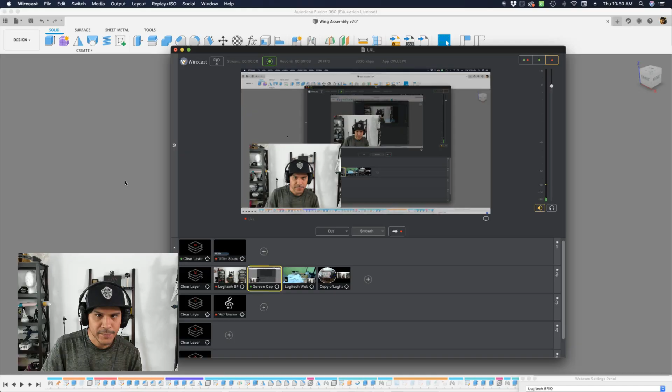It's a fun animatronic wings, a set of wings that uses servos. Here's a little video of our prototype in action with the wings mounted.

This uses the Adafruit Feather M4 as the microcontroller, and to power the two servos we're using the Adafruit Servo FeatherWing. That gives you 8 channels, so you can have 8 different servos doing things. And it's all running on CircuitPython.

Very sweet. So I want to talk about the design of the servo horn attachments and a little bit of the mounting bit. So there's the demo, and let's jump into what we have. Here's the CAD assembly.

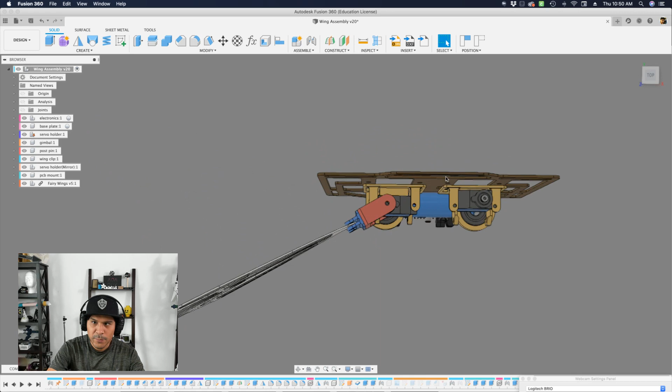I have one wing set up here, and it was really important to get the joint set up so I can simulate the movement of the servo horn. So this is a joint that's attached to the servo, and you can see here we have some degrees of freedom. It's able to come out here, and then it can go back up here.

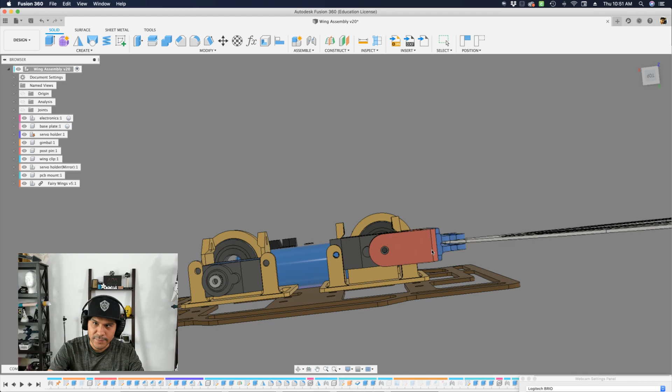So it's about 90 degrees or 120 degrees of rotation, not too much here. But what's interesting is the way the load is being counterbalanced.

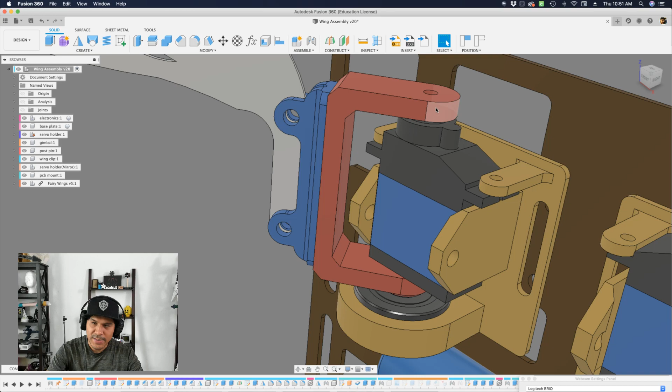Underneath the servo is this ball bearing. It's a ZZ608 ball bearing, kind of your standard size. What it does is it offloads all of the weight from the shaft of the servo down here. Because of the way it's mounted, we need to have this counterweight. So it works out pretty well.

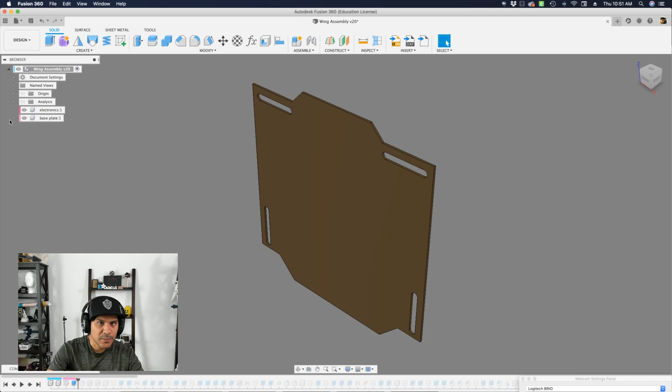So I'm going to step back into the timeline and walk through the design. Really the first thing was to create the base plate to house everything. This is going to be worn on your back, as you saw in the demo.

I just needed to make a couple measurements, really. The two main measurements: it needs to fit on your back, and it needs to fit on the bed of my 3D printer, because I just want it to be one piece, or at least one piece for the backpack piece.

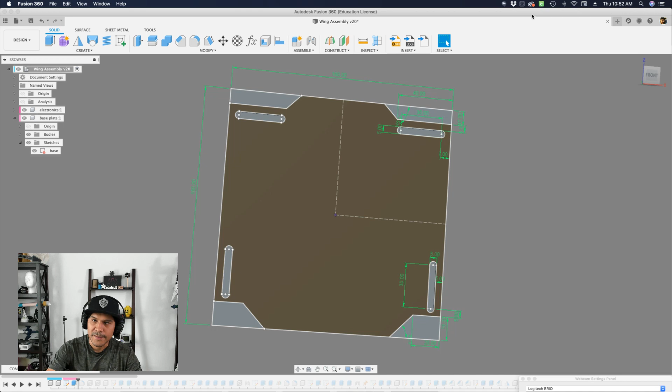And then we have these 4 slots that will act as attachment points for the backpack straps. So that's why I have them set up here. They're fixed numbers right now, but we could totally add user parameters.

What makes this neat is that I can adjust the overall dimension of the width and the height of the base plate, and these slots will actually stay retained to the edges because I've assigned them with some sketch dimensions. So I'll do a little demo here.

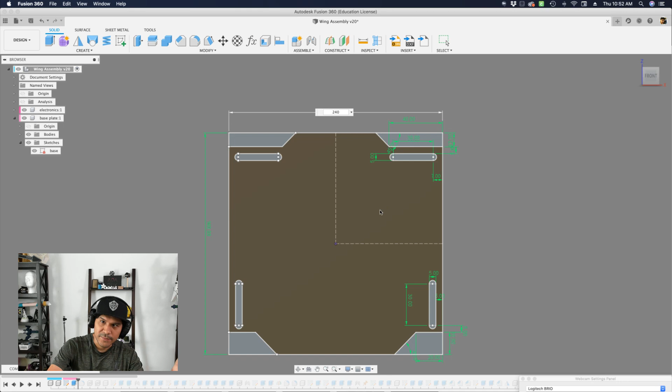Let's change that value there. You'll see the 4 tabs stay positioned because I have these very simple sketch dimensions that say, hey, you should be a certain distance away from this. So that's why I have these set up.

Let me undo that because it's not the shape we want. But yeah, it's very symmetrical. It's drawn like in the center.

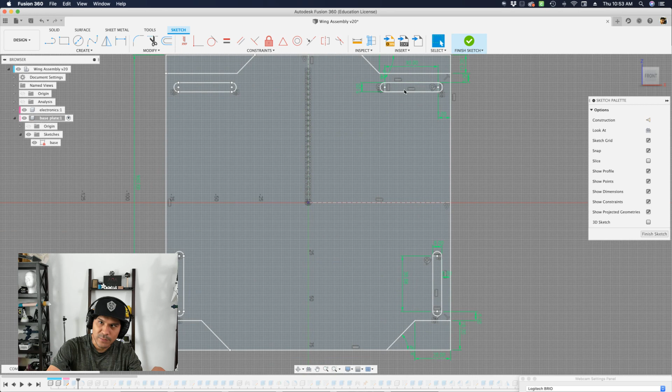So if you jump into the sketch, you can see I really just did 2 slots, and then I mirrored them. You can see all the different mirrors right here of all these little lines. So that's how that's working. It's a nice set of mirrors of shapes.

This could totally be changed up. We can add some more curves and things like that. I just wanted to have something that was easily adjustable and has some shapes to go worn on the back.

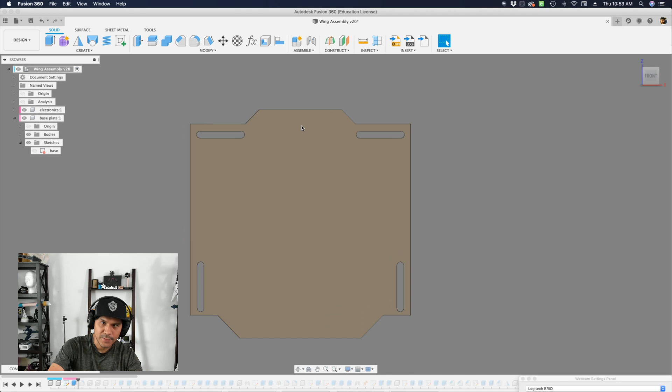The next thing I did was I had to model up the servo. Let's take a look at it real quick. This little guy is a high torque, all metal servo, and it's pretty high power as well. Here it is, it's from Adafruit. It's the high powered, high torque, full metal gear, the MG92B.

Unfortunately, the servo doesn't have super great technical drawings, but I was able to go to their website—I think it's Tower Pro. You go to their website and they have a data sheet and you can pull some numbers from there. But I did have to use my calipers to figure out the distance between these mounting holes.

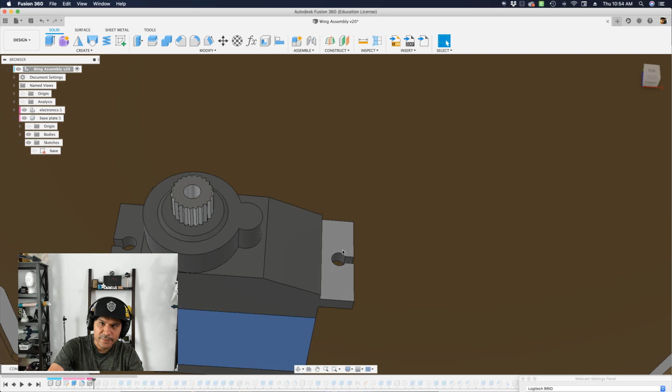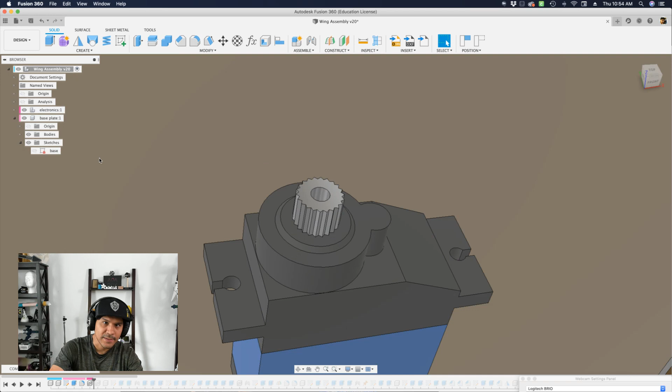What's interesting about this servo is that I designed it so the shaft has a rotational joint. I can't show it right now since it's not grounded, but if I open this, you can see it moving. I set it up as a 2-component piece: a body that's grounded, and a spline that's independent.

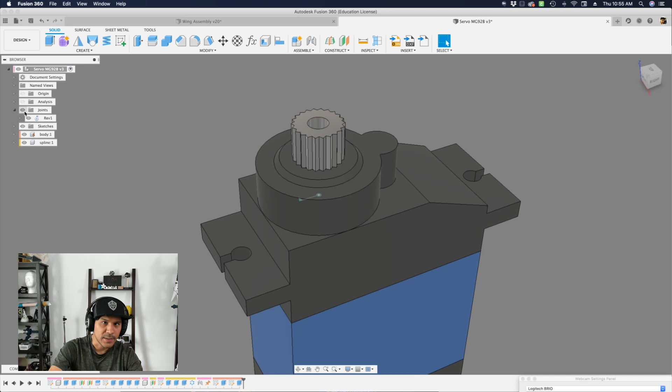If we look at the joint, I have it hidden because I don't like seeing it when I import it. That's the joint there, and it's a revolve joint. So I can move this, and you can see it moving around. There's no limits to it since it's just rotation, so it's free to rotate 360 degrees.

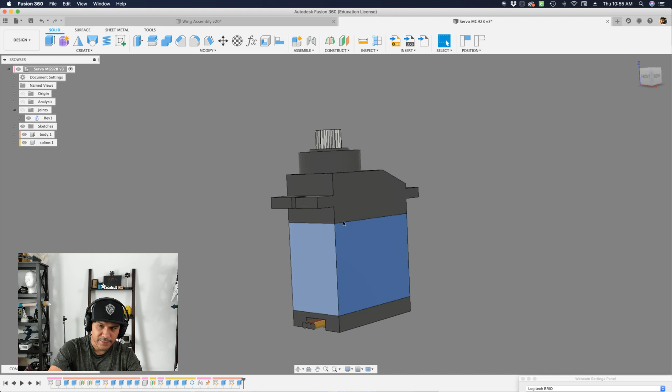Building that into the servo is really helpful because I can simulate it a bit better this way. Not too much here in the timeline to create it, but it's got some shapes. I've already tested it - the mounting holes are correct, and the sizing and fitting is pretty one-to-one to what I've modeled, which is nice. So here it is.

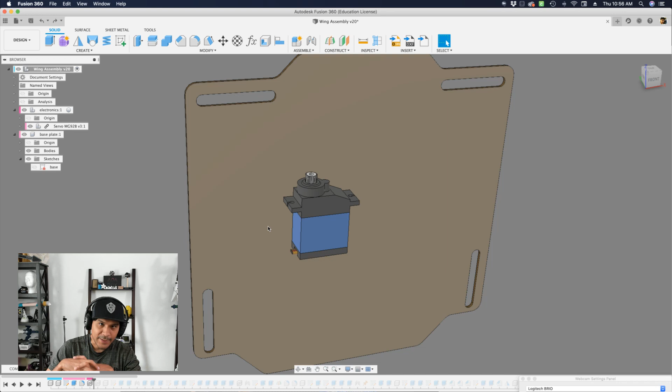After bringing it in and modeling that up, I had to figure out how to secure the servo to this mounting plate. Years ago I'd try to do everything in one piece, integrating all the tabs into the backpack. We could do that and it's all integrated, but it would take maybe 4 or 6 hours, and then you find out you're off by 0.5 millimeter, so that whole piece becomes useless.

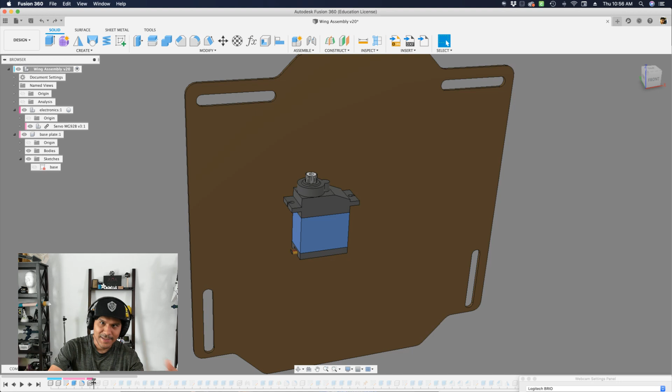So I figured let's make it all modular. The servo attachment will be separate from the backpack base plate, because we can quickly print out a small servo attachment as opposed to printing the whole base plate. That took me a few years to do, since I had the mentality to make everything simple with a single part instead of many parts.

Because we're 3D printing and trying to get this done quickly, we need to figure out the tolerances right away - it's better to have it modular, at least for this medium. So here I'm creating some sort of mount for the servo.

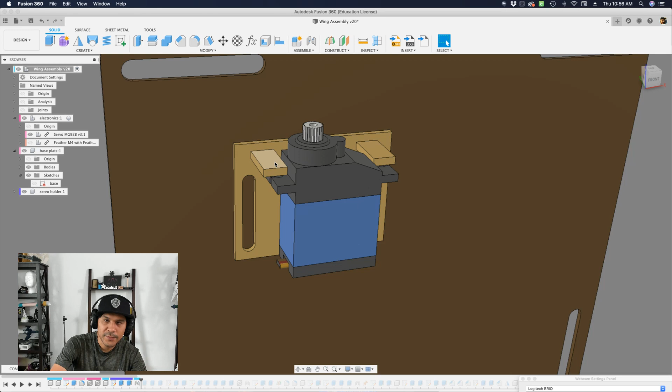You can see here I have some offset, because as I was making this I realized I actually can't have this surface flush with the surface of the servo due to the nature of using a ball bearing, which we'll get into.

I have these 2 slots on the sides that will be used to mount the servo holder to the base plate. Then I have these 2 thin walls here that extrude upwards, so we can attach it to the mounting tabs of the servo.

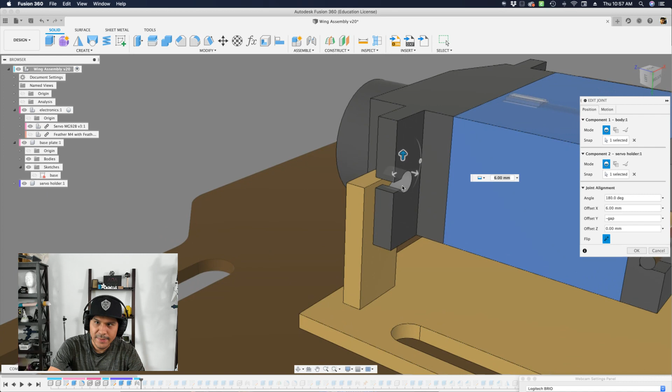If you look at the joint, it's just a rigid joint there, fixed in place. The way I joined it, I picked one of these edges and tied it to that edge, then added a bit of an offset gap right there for some tolerances.

If you look at it from the top, you can see I'm a little bit off there and a little bit off there, just for clearances, because the tolerances tend to expand a little or maybe shrink a little, so I just wanted to have those there.

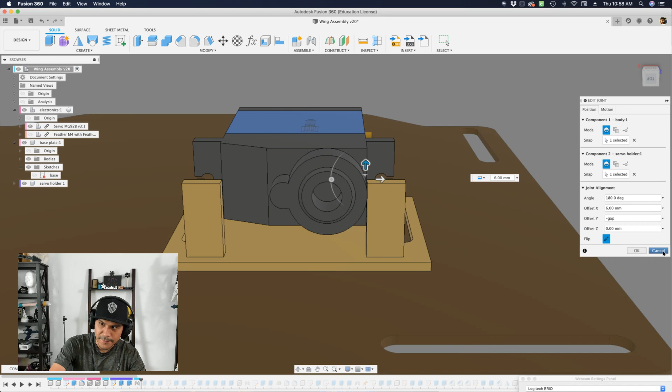The next series of extrusions are next - let's see what we did here, just fleshing out the holder. So if we hide the servo, you can see I have this kind of hollow circle here.

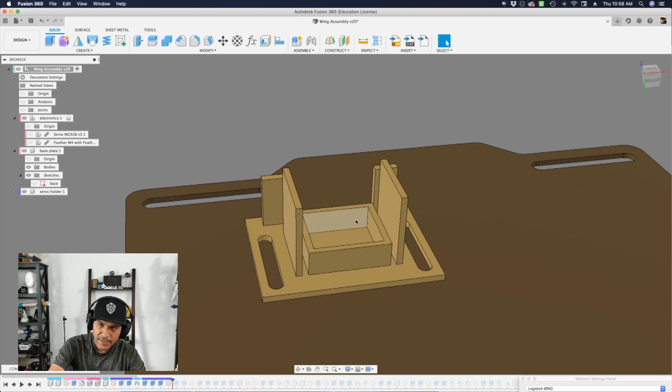Instead of having all of this be one solid piece, which would mean printing a lot of stuff, it's just a thin wall here to elevate that servo. That was a neat trick - making a shelled wall instead of creating a whole solid to elevate it.

And then I have these walls here on the sides that will kind of clip and hold the thing in place. So that's what's going on there.

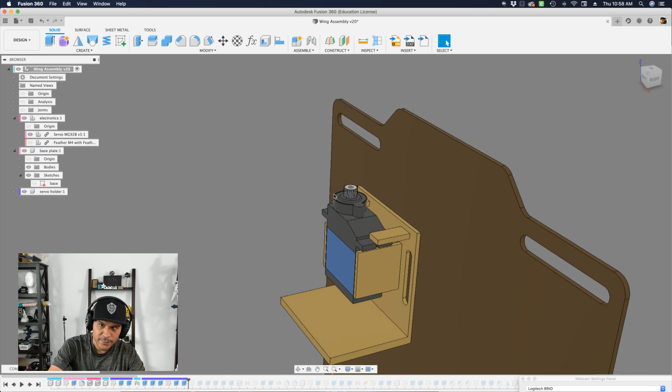The next stuff I create is how am I going to counterbalance all of the load on the servo arm. I haven't created a servo arm yet, but in my head I figured let's use a ball bearing to offload the weight. So I have this extrusion here.

So really it's printable so far. If you look at it in this orientation, the servo attachment, the servo mount can print without any supports. Nothing so far has overhangs. Everything just kind of extrudes up, no issues there.

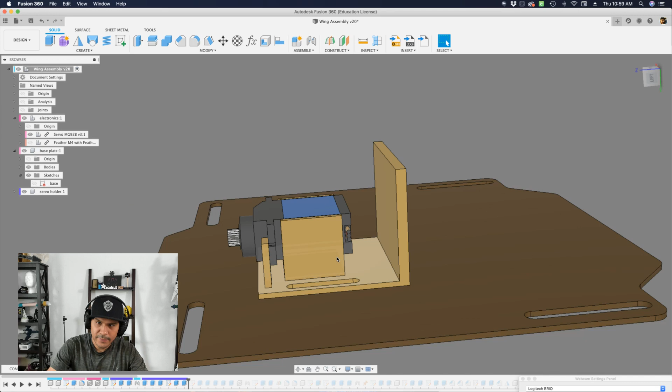So as I start sketching out, I'm starting to create this geometry for press fitting a ball bearing in the center here. So as I make one more extrusion, you can see I kind of trim away that extra fat, that extra material, and that way we only have a nice holder for the ball bearing.

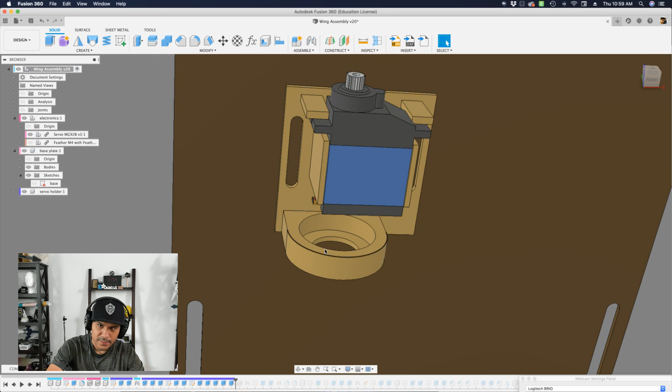And still, you can see here, there aren't much overhang. You can totally print out this geometry without any support because it tends to kind of taper inward, which is really nice. And then I actually import the ball bearing and I affix it to here via a joint.

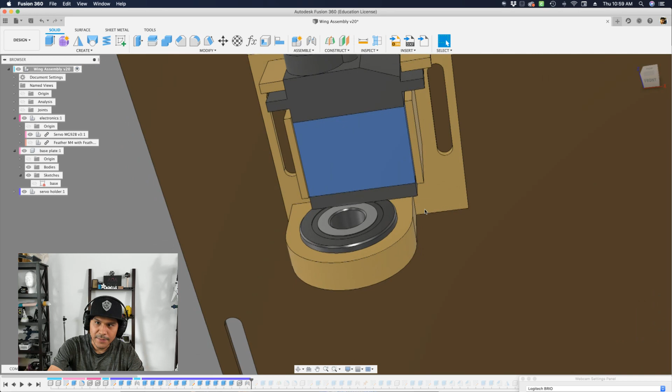So now you can see here, it is offset, right? It looks like offset. Originally, I had made this whole thing centered with the servo mount, but if you look at the servo itself, a servo is not symmetrical. It is offset. So if you look at the body of the servo and the shaft of the servo, they aren't actually lined up symmetrically. It's symmetrical this way, but not this way.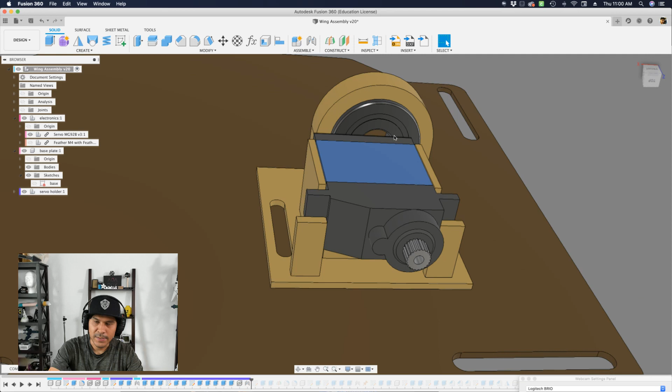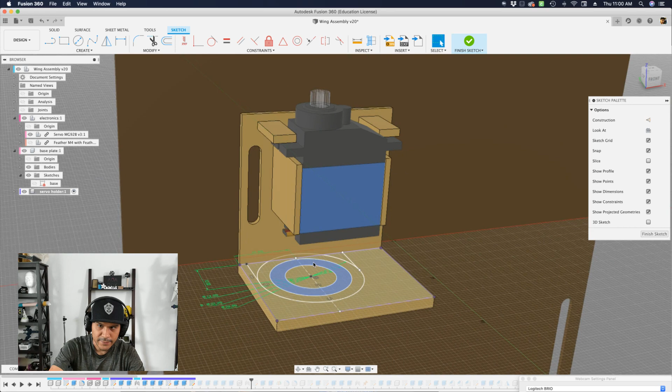So that's why I had to be real careful with the positioning and the sketching of the ball bearing. So if you look at the sketch, looking at it from the top, it is perfectly going down the center, and it's concentric with the shaft of the servo. So that's how I created that. Just had to offset those series of concentric circles, and that's really all that it took to make that.

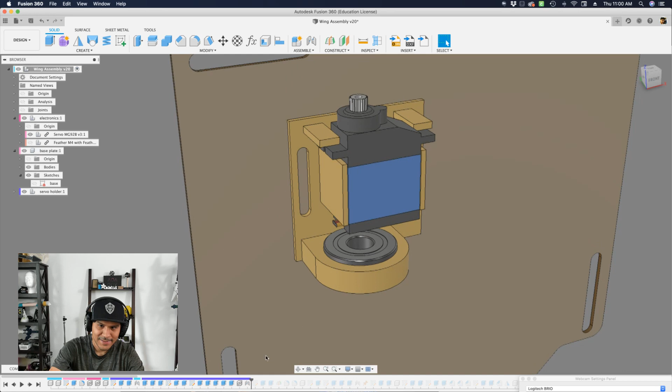And I have it a little bit out there. I created this cutout at the bottom so I can pop out the servo. If this wasn't here, it would be hard to pop out the servo because you don't have much here, since it's press fitted. It's not secured with glue or anything, it just literally press fits, with a tiny bit of tolerance between those surfaces. So that's how I got it. It's just a fixed joint.

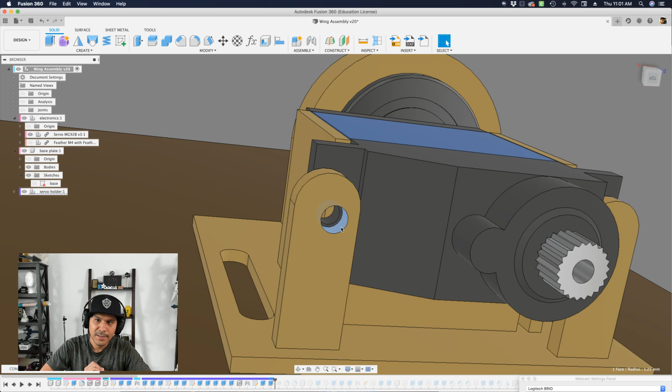Okay, the next stuff is to create some of these mounting holes so that I can add a screw in there and a hex nut on the back so that I can secure those two mounting tabs. At first I didn't think it would print out good, but it prints out fine. I ended up just making the hole slightly smaller, a 2.5 millimeter diameter, and then using an actual screw tap, a tapping tool, I can create those threads so that it has nicer threads.

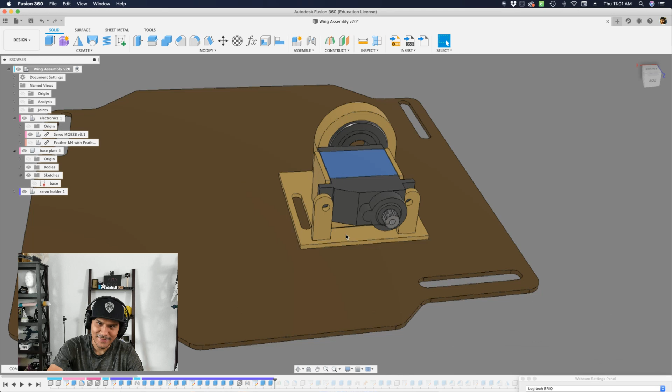Straight out of the printer, of course you can model your threads here, but it's such a small diameter that I don't think it would resolve well unless you were printing with a DLP printer or something with more high resolution. But all this is designed for FDM printing, and this is kind of the smallest geometry you can make before things get a little messy. But it ends up working pretty well, and it's not too thin — just the right amount of thickness to print and be reliable and sturdy.

All right, the next series of stuff is kind of smoothing out some things with some fillets. Not much going on there.

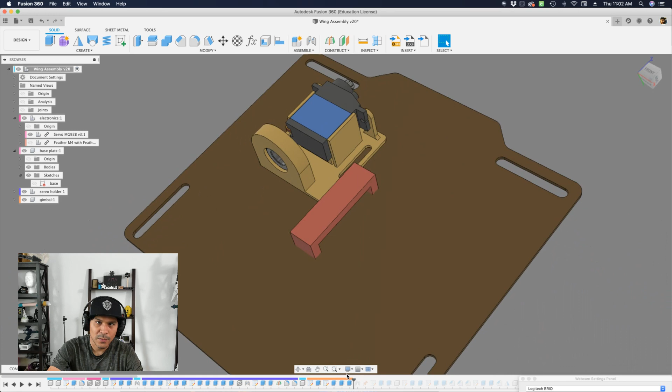Let's move forward. I think at this point we're creating the servo arm. So the servo arm is what gets actually attached to the shaft of the servo so that we can get some motion. Looking at its profile, it's pretty simple — just a series of lines, with a fixed value for the length. I try to keep a consistent thickness of the profile, so it's got a 4 millimeter thickness going on here, and it's centered.

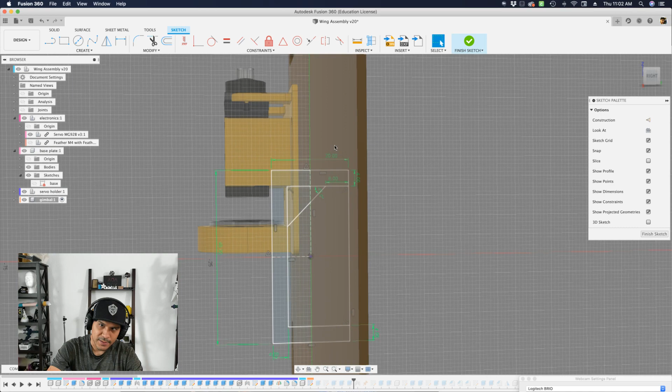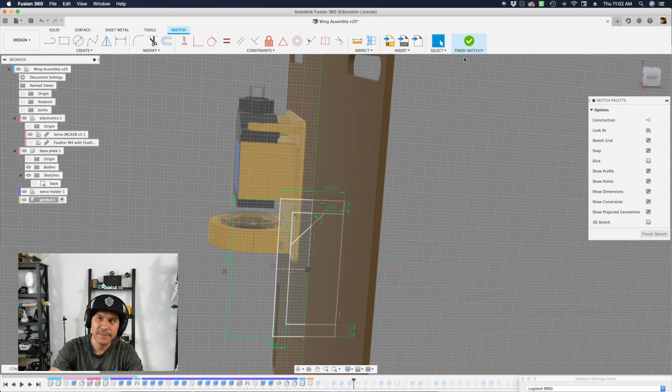So instead of sketching it in place where it already is, I decided to sketch it in the center of its own component, its own origin, so that if we ever need to use mirroring features, we'll have a very symmetrical design because it was drawn in the center of its origin.

So once I flesh out the main shape here, the extrusion, just a couple extrusions, I had to create some holes as well. Then I apply a joint, so I attach the servo arm to the shaft of the servo.

And what's interesting, if you look at the joint, you're probably thinking, oh, that's a revolute, right? No, it's rigid, because the revolute has already been assigned to the servo, which I think is great - that's a great way to do it. Because when you import a design that has joints, those joints are movable and editable inside your assembly.

That's really nice. I wasn't too sure if that would work, and it does. So now that it's attached, I can actually start moving this. And you can see here, well, that's not moving because it's not grounded yet. Sure, the servo is grounded, but the servo is attached to this piece, and this isn't attached to anything.

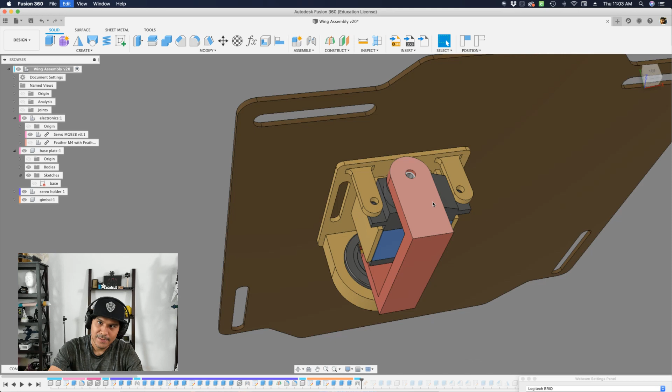So that makes a lot of sense if you think about it. So what I did is, this little pin here grounds the servo holder. So now with it grounded, I can manipulate and move and test the degrees of freedom on this. And you can see here, I had to be very careful not to crash into it.

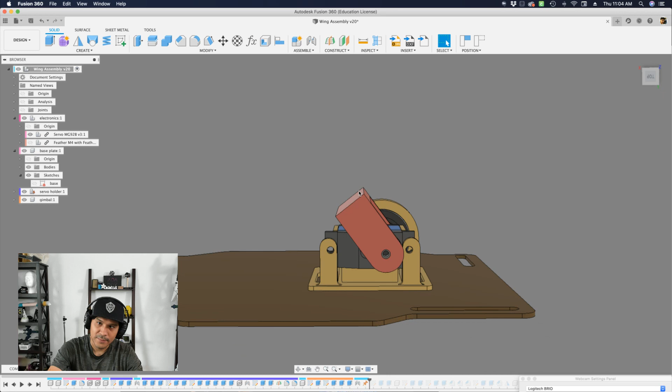Because if you look at the servo's orientation, if you try to go this way, you're going to crash into it. But because they're wings, your wings can't do that - they would intersect with each other. So that's why it's positioned this way.

So if we start to rotate it this way, about 120 degrees going down, you can see here that I can kind of complete the whole area here until I crash into it. But even the wings, if they're coming out, they don't need to spread that far. So I have a little bit extra clearance there, which is great.

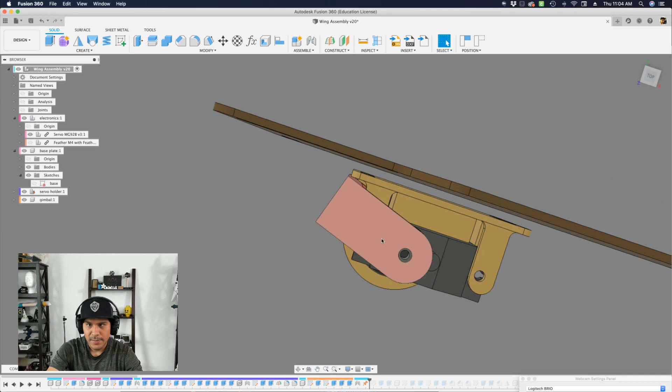And you can see the wiring just about clears this area. So I actually have the wiring come up and then out this way and then down here. So that was strategic placement there.

So once I figured that out, then I had to figure out how do I attach the bottom of the servo arm to the center of our ball bearing, because that's really what we need to do.

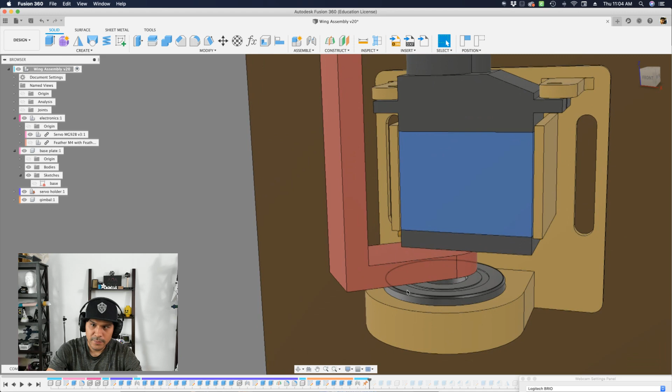The ball bearing is press fitted and basically rigid jointed to the servo holder itself. So that allows this center area of the ball bearing to be free to spin and rotate.

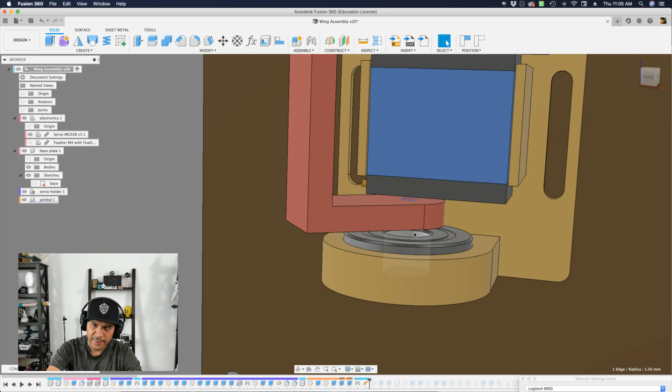So what I needed to figure out is how do I get this hole from the servo arm to be fixed to the center of this guy.

So originally I was thinking, oh, I could just extrude out a tube, a cylinder, so that it would be press fitted through the center of our ball bearing. The problem with that though is the way it's already designed, I would have to probably use some support material or get rid of these fillets and have it printed on this way.

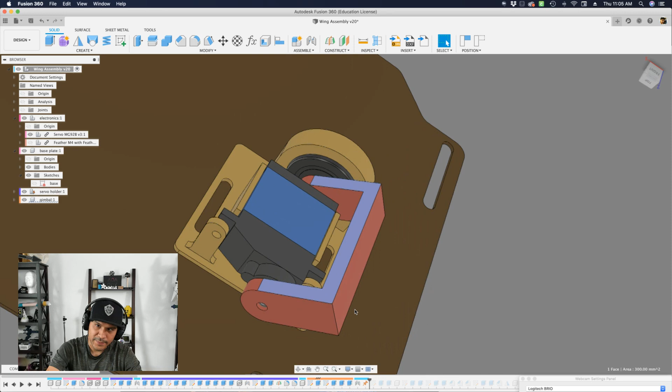But I really wanted this surface here of the servo arm to be flush with the bed of the printer. That way I have a really nice surface to adhere other pieces to, which we'll look at.

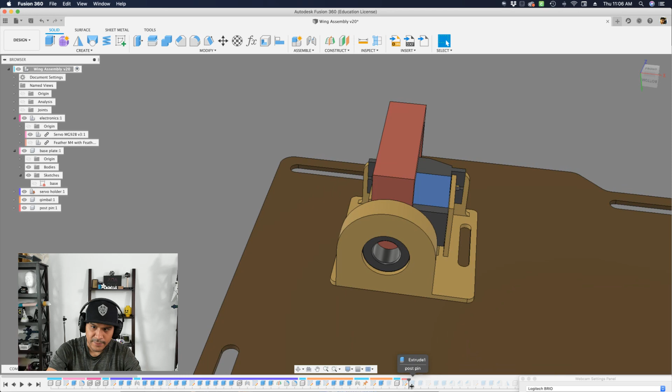So what I ended up doing is making that a separate component. I made a little component called post pin, and that is a little cylindrical kind of peg that is press fitted through the ball bearing. And that gives us a little bit of a hole here that we can add a screw and actually affix and secure this piece to the servo arm.

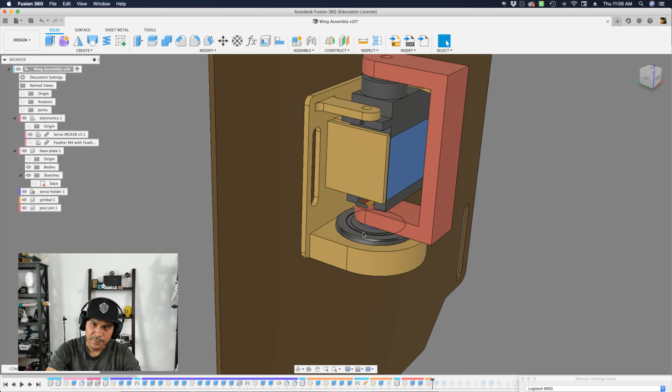So by doing that, we avoid using support material and it makes it even more modular, which is great. I didn't even have to really use joints because the main motion is all done here. I don't really need to simulate the ball bearing in motion - it just doesn't need to. It'd be a little bit overkill. You don't really need to do that.

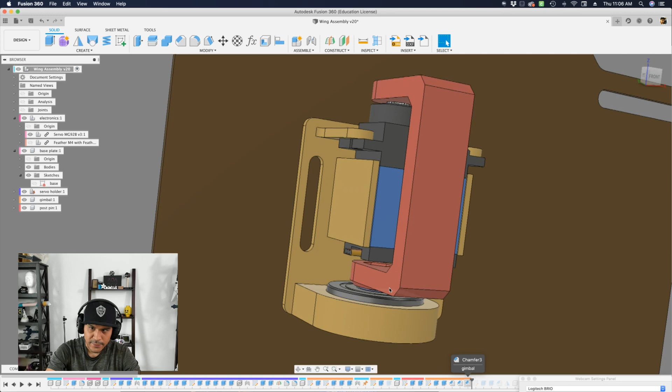So you can see here I have a little bit of clearances, and as I step through, I start fine tuning and extruding just a little bit out here.

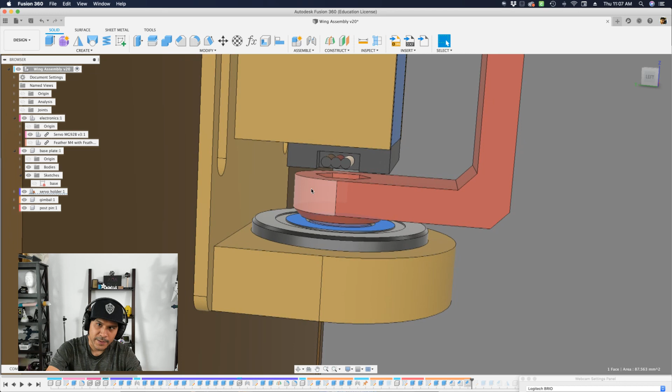I actually added a hex nut, a hole for a hex nut here. So this will be kind of a cap nut. You fit the cap nut in there, and then you can add a screw down here. That cap nut will secure to the thread of the screw and affix the center of the ball bearing to your servo arm so that your servo arm is free to move, and all the load of our wing will now be on that ball bearing, and it can hold plenty of weight, a couple pounds actually.

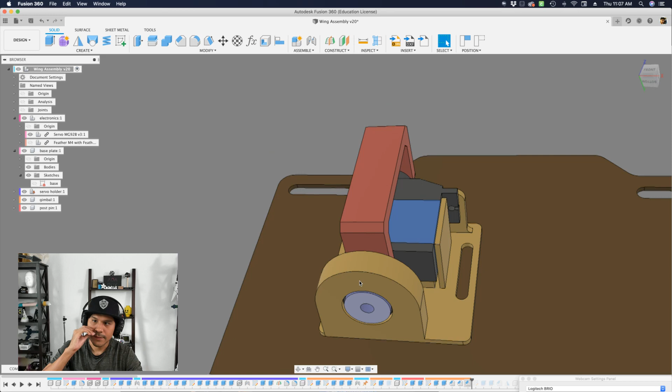So that's really the hardest part of this, was to get all of these joints working together and figuring out how to make this support free 3D printing, FDM 3D printing, and still modular so that I can adjust things.

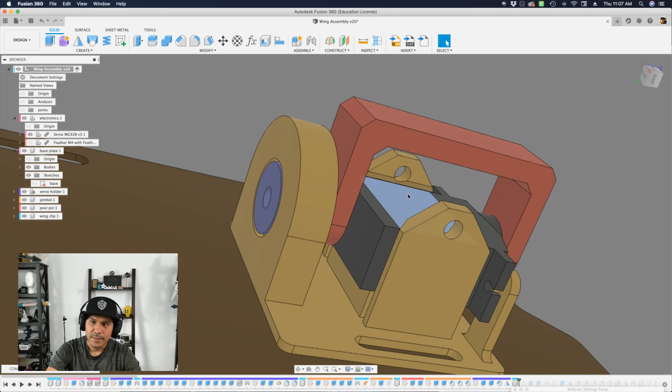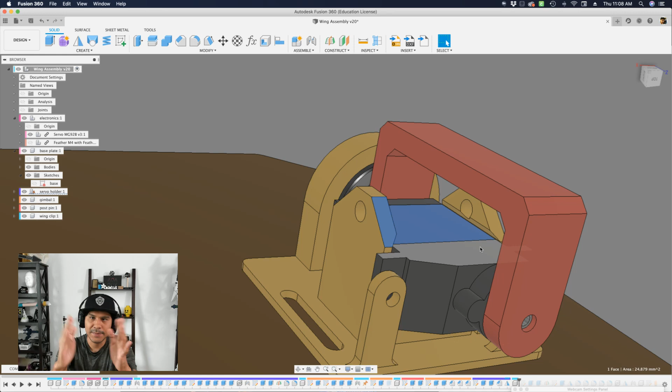I think the rest of, let's see what else we got here. Yeah, so I added even more secured parts. So although we have security here with these two mounting holes, I wanted to mount the entire body of the servo to the holder. So I added these two tabs, and they extrude slightly inwards so that it actually clips. These two extruded walls can actually flex slightly, so you imagine this being flexed open, and then the servo gets pressed in, and then it clips back in there, and it has that extra bit of security.

And then I actually have mounting holes here, so I have a long M3 screw going out here, through the other side, and then I can add a lock nut to secure this. This thing ain't going nowhere. It's super secured now.

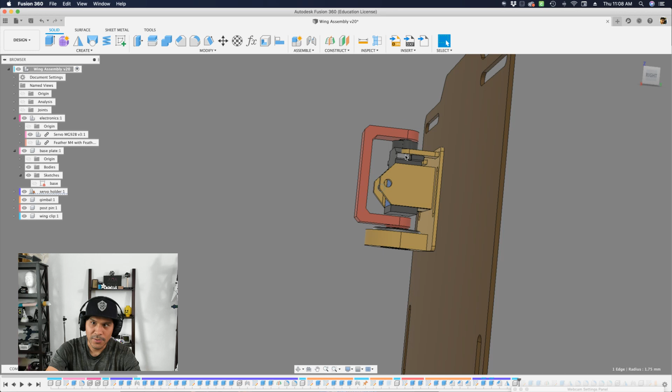So that's great, you want that because you're going to have lots of load. Looking at it in this orientation, you're going to have lots of load, and I don't want the thing to just fall out. I can't quite simulate that because I have the joints all tied there and the thing's grounded, so I can't actually move it. But you get the idea.

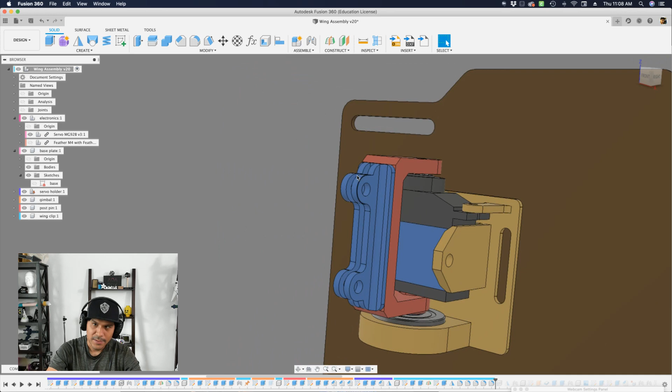All right, I think the next stuff is, okay, so here we're creating the attachment for the wings, which I dubbed the wing clip. So this clips the wing to our servo arm. I foresee this being updated because we're still working out the construction of the wing.

The wing itself is going to be constructed out of Bristol board using a vinyl cutter, and we're going to heat transfer multiple materials to create this really lovely wing that has this iridescent, transparent goodness. We can't 3D print that, so we're going to use a vinyl cutter to create this fairly large wing.

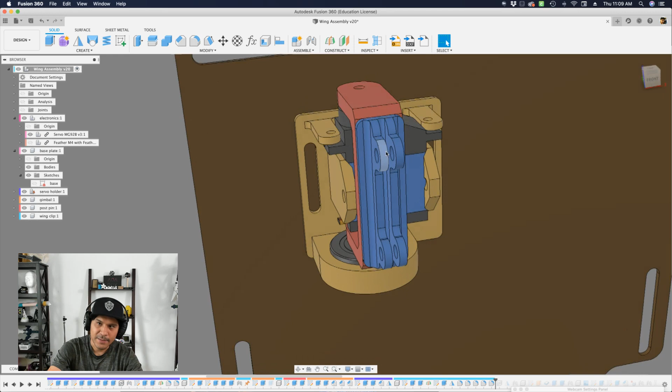And this guy here, these two walls here, allow the wing to go in the middle. It's very thin right now, pretty paper thin, but we have plenty of surface area here to expand that out and even add more mounting holes if we want to do some sort of shoelace threading where it weaves in and out, maybe with some wire, some string, paracord. But right now I actually just have screws, which works well too.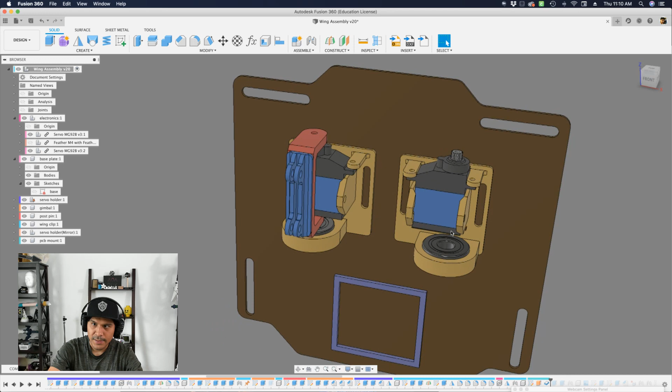All right, I think the rest of the assembly is creating another version of it. I mean, creating another servo arm. I just mirror basically that. I didn't mirror the servo arm because I just needed to mirror the servo and the servo holder so I can make sure I can see what the distance between the two wings are going to be.

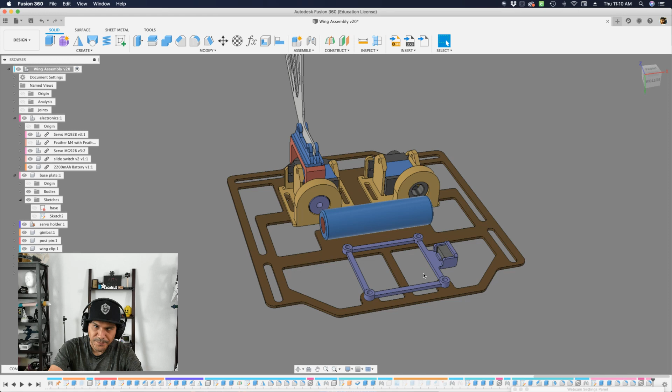And then after that, I start working on the PCB holder. The PCB in this is the FeatherWing Doubler and the Servo FeatherWing. This is actually the motor FeatherWing because I got confused—I thought this was for stepper motors, not a servo. They're completely different, but it doesn't matter because the PCB is still the same size.

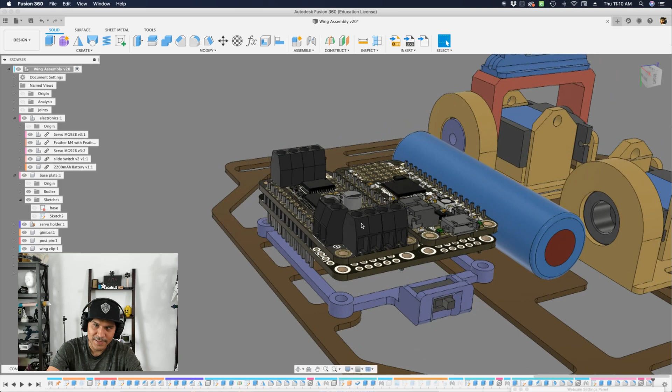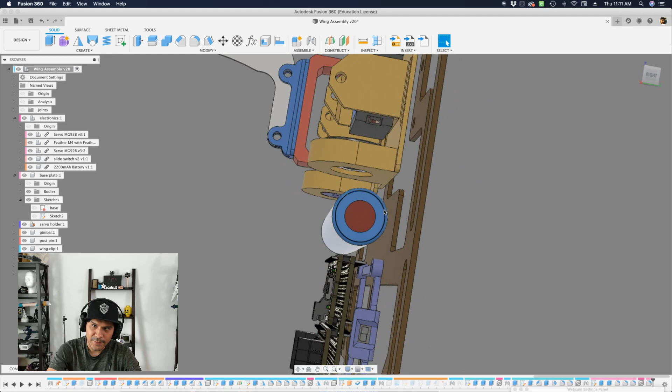The mounting holes are the exact same, and there isn't anything enclosing the PCBs just yet, so I don't have to worry about height clearances. You can see here I have a little built-in slide switch, and this will get secured here to the backpack base plate with some more screws. Then I add the battery, and I thought the battery would work well in the center here, and I still have to design a little clip that will allow this to slot in instead of just sticking it to the surface.

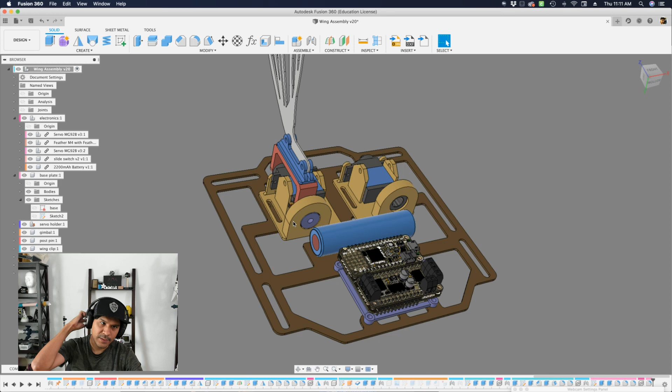Now that we've gone through the end of the timeline, you can see I've added tons of cutouts to the base plate. What's that about? Really, it's just to reduce the printing time. If I were to print this base plate without these cutouts, that would take maybe 4 to 6 hours. But with all these reliefs, all these cuts, I reduced it to just 2 hours.

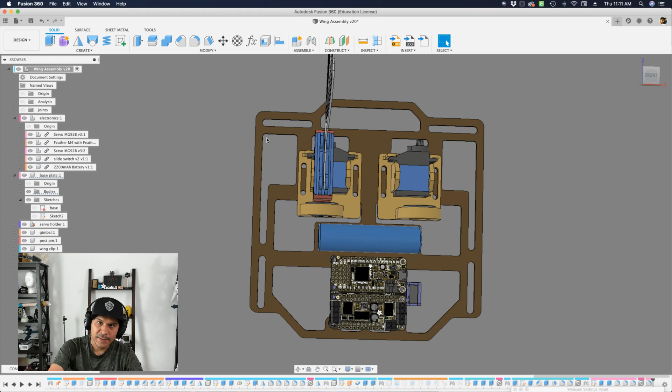So this took 2 hours to print, and it's just another sketch on top, and then I assign it. I'm trying to keep a consistent amount of thickness between those cutouts, so there's some consistency going on here. I even made some tabs for the PCB mount, and there's lots of open area here, so it's a nice lightweight plate that's still sturdy enough to house all these components without too much flexibility.

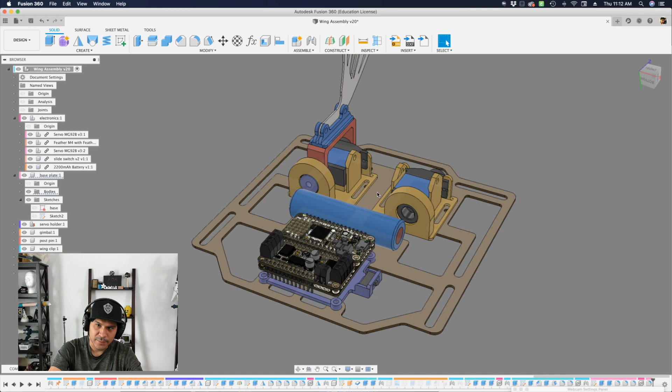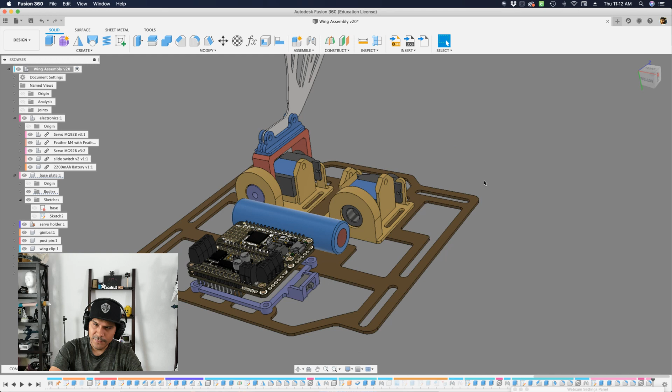So that's the strategy behind that, to create some holes where there isn't any need for material, but still have a nice amount of thickness between all the mounting holes so that things have rigidity. But that's really it. At this point, we can mount this to a hat.

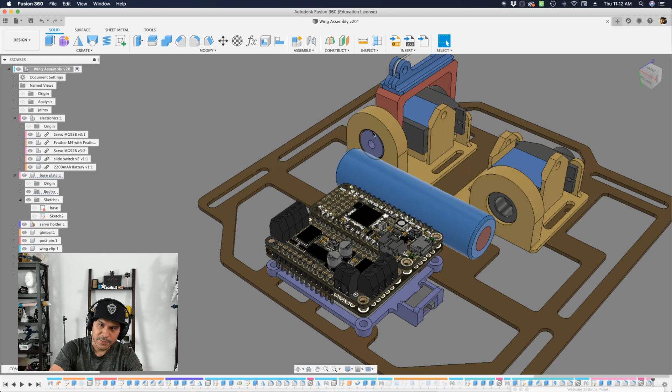You know, you want to do some ears or a tail or something like that. I figured instead of just using 2 servos - and you can totally power 2 servos off the Adafruit Feather M4 - with the 8 channels in the Servo FeatherWing, you can add ears, you can add up to 8 servos. So that's really nice, and I think that's a great way to have this future-proof.

So if folks want to add more things to their backpack or their costume or whatever they're making, you have up to 8 channels, up to 8 servos you can do. So that's really cool. All powered here.

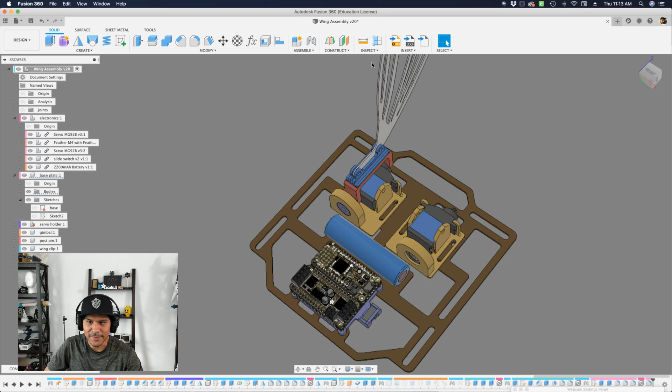All powered off of this one battery because I'm using the 5-volt mini boost, since the Servo FeatherWing requires external power. The mini boost allows you to get a clean 5 volts, 1 amp out of it, which is really nice. I totally recommend it.

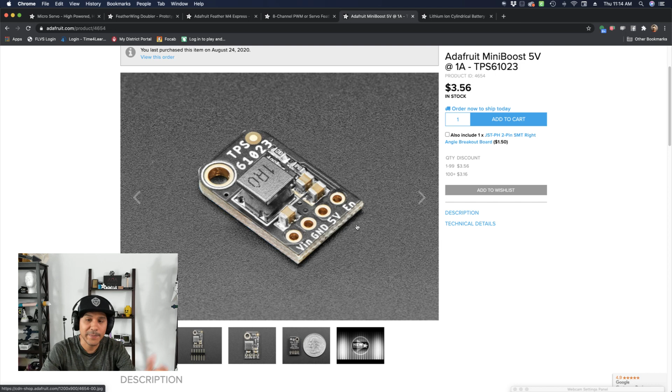And then this is the Mini Boost, 5 volt, 1 amp - just a little chip here that you can use with a 3.7 volt LiPo battery like this one. When you wire up your microcontroller's V out pin or BAT pin to the VIN and ground, you can get a clean 5 volt 1 amp out of this one pin, which is really powerful because now I don't need 2 power supplies. I just have this one battery and it's running the controller and the 2 servos without any problems.

So that's awesome. Also, the FeatherWing Doubler is really great if you don't want to keep stacking feathers - you can spread them out. For this one, I think it worked really well. You can use low profile headers, regular headers, solder directly to them if you'd like, and if you don't want any clearance in between them, you can get it really thin.

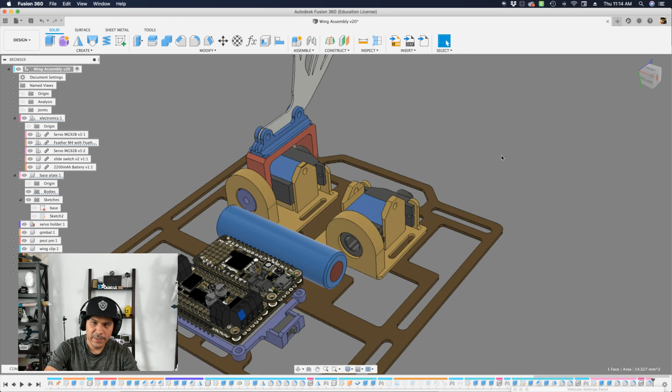This project will be a fully documented learn guide, and we'll have a little video as well explaining an overview of the project. But I thought I'd go through and walk through some of the CAD stuff. Hopefully folks learned a thing or two, more high level of like, what is the reason these shapes look like that, right? So if you guys have any questions on it, feel free to ask them in the comments, and maybe I'll cover them in the next video.